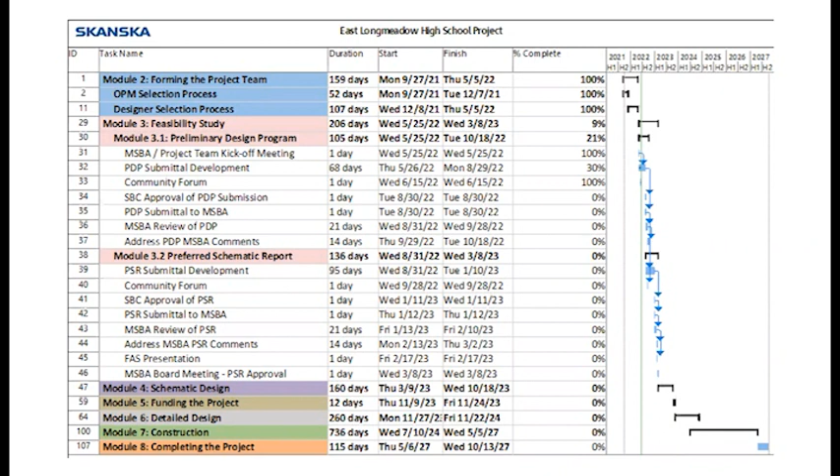Next up is Fantini and team. I think Christian is controlling the PowerPoint remotely. So we will move into the existing conditions report, and I think Christian is actually up first.

I think it's Eric, Helen, but yeah, we did do two different visits out to the site, one to work with the site team, and one to work more on the building itself. I'm going to pass it off to Eric to talk about the existing site.

For those who have not met Eric yet, this is Eric Vangsness. He's a landscape architect with SMMA and also a graduate of this institution, this school district. Proud class of 2001, so welcome back. Thank you very much. So that's why I have the big smile on my face. Obviously, this is a dream come true, let me just first say.

So what we wanted to start off with today is reviewing where this site sits in relationship to the town. What is this site surrounded by, and what makes this site special? Just looking at this first aerial, I think it becomes readily apparent.

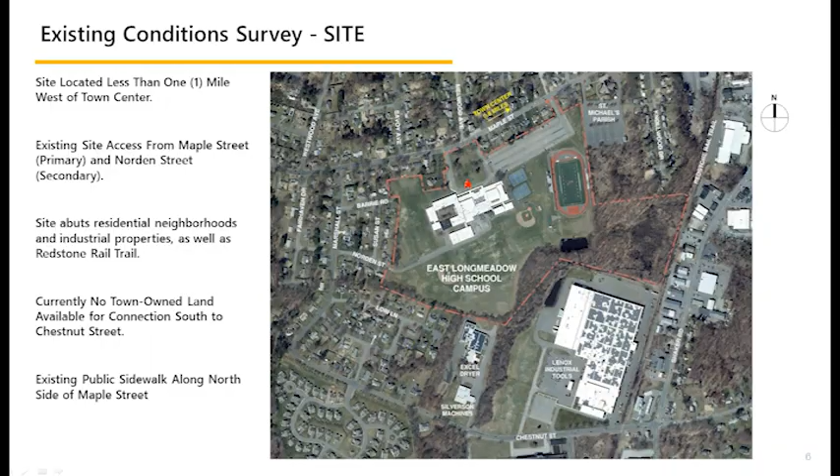This site is a little bit less than a mile from the Rotary, and it's a large site, a little over 61 acres from what we gathered, and it's a single parcel. The frontage is on Maple Street, with three points of access basically from Maple Street: one right in front of the building with the horseshoe drive, then there's the ancillary connection at the northeast corner, and a secondary access down on Norden Street.

The site has residential properties on Maple Street to the north, St. Michael's Parish to the east, Lenox Industrial Tools — I knew it as American Saw growing up — to the south, along with a couple more industrial businesses, Excel Dryer and Silverson Machines. Then we get into the neighborhoods: Laurie Lane, Norden Street, Barrie Road, and Marshall Street residences to the south and west.

But I think what makes this site so special is it's this huge green park amidst all this developed space. Very few towns get the opportunity to have such an expansive program of athletic fields and open space when the rest of it is so highly developed. So this gives you an idea of where the site sits in town.

Obviously to the west is Longmeadow. Right now, as far as we know, there is no town-owned connection to Chestnut Street. When we first had these initial conversations, there was some talk about whether we could make a connection to Chestnut Street to maybe alleviate some of the congestion on Maple Street. Right now the town doesn't own any property to that effect, but there could potentially be some opportunities, which we'll get into with the preliminary site studies of potential connections. That would have to be coordinated with the property owners to the south.

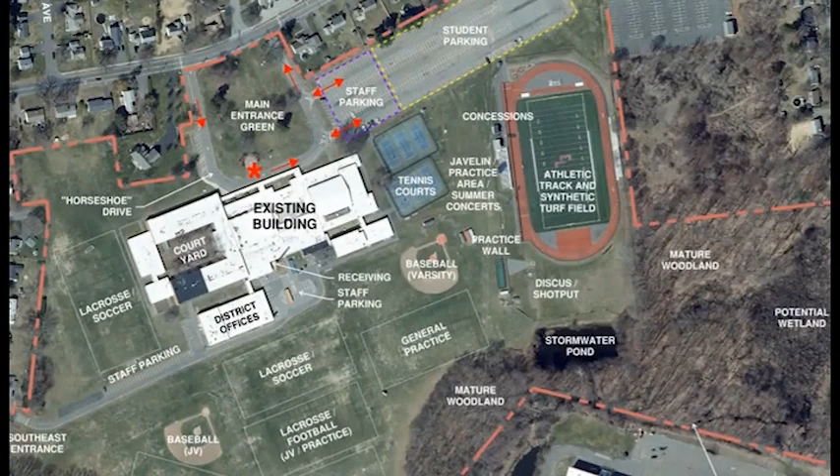There's really no traffic management measures present in that main parking lot right now. It's really just everybody converges, it clusters and bottlenecks up, and eventually, by 2:15, most of those cars had exited. In fact, I think we actually saw that entrance clear out later than the Horseshoe.

The Horseshoe seemed to be empty, and this one was still backed up, which I thought was interesting. You'd think some people would go the other way, but we also saw that some parents were picking up students.

In St. Michael's Parish, right now there's a sidewalk that runs along the north side of Maple Street, and there's the signalized pedestrian crossing. There's also one on the west side of the Horseshoe, the signalized one at the east side of the Horseshoe, but there's no real defined crossing at the northeast entrance.

So what we saw was a lot of kids were actually walking east. They cut through the lawn, they go through St. Michael's Parish. Some are picked up by cars, some continue on to points north and east from there. But there's really no dedicated pedestrian routes for them to do that - it's walking through grass and private property.

On the site, there's the 6 existing tennis courts. Those are in fair condition. They're going to need to be resurfaced pretty soon - we heard in the 2 to 3 year time frame.

There's the existing football stadium or multi-sport synthetic turf field for many of the fall sports, and the stadium with the bleachers. We did note the press box and the announcer's box are not ADA accessible - they don't have a ramp up to them. We also noticed some condition issues with the concession stands, and I know there was concern by the athletic director about the condition of those.

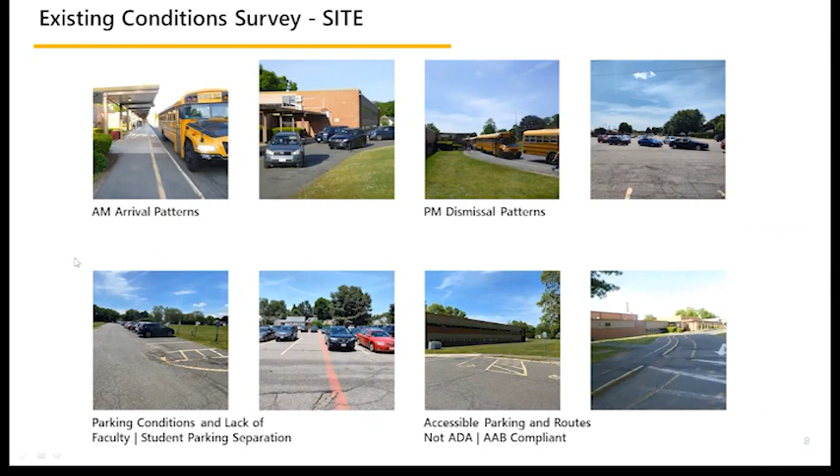And then just again, there's wooded wetlands we should keep in mind to the south. And in terms of just a quick touch on utilities that we should keep in mind, a good majority of the site ends up draining toward the existing stormwater pond at the southeast corner. And right now we've noticed some issues, and we've talked with Bruce and the other staff about some drainage related issues in terms of roof drains that are tied into floor drains.

During heavy events, we understand the boiler room floor drains actually back up and that water can get into the boiler rooms. We also understand right now sewer is gravity fed, and there's some issues associated with it - it doesn't have much pitch to it. So every year or 2, we understand there's blockages that can occur, and those blockages have to be flushed out.

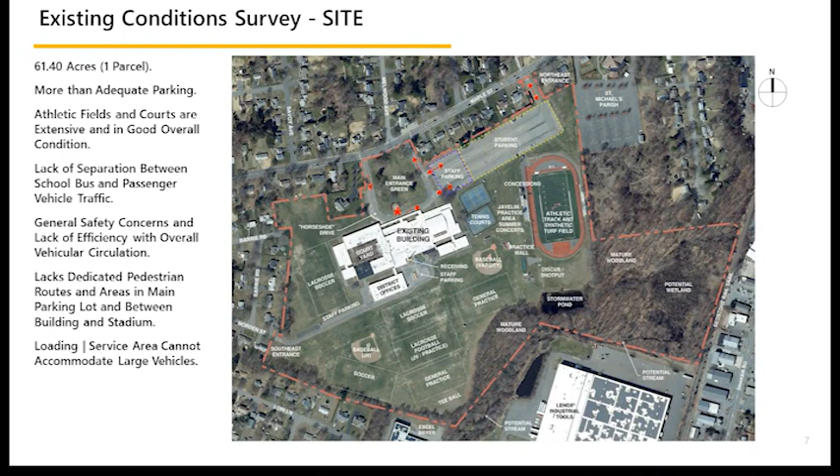Municipal water services the site, both the irrigation system and the building itself. We do understand though that that's asbestos cement material, so we would certainly - that would be an opportunity to upgrade that to a more modern material like a ductile iron or something of that nature.

But again, it's a magnificent property. You don't want to take that away from it. It's a magnificent property, and there's a lot of opportunities here. Next slide, Christian.

Okay, more site specific now. We already talked a little bit about the arrival patterns, how the horseshoe ends up getting a little bit clogged with school buses and passenger cars getting intermixed. Most of the school buses come on the earlier side, which has quelled that a little bit. We weren't here during the busiest traffic, but you can see in those top two pictures that both types of vehicles are using it.

PM dismissal, we talked about that as well. You can see that image in the upper right showing all those lanes of cars converging at the northeast corner.

Generally site-wide, the pavement is in fair to poor condition. There's a lot of cracking, potholes, and surfaces that are not ADA compliant. So the pavement really needs to be upgraded.

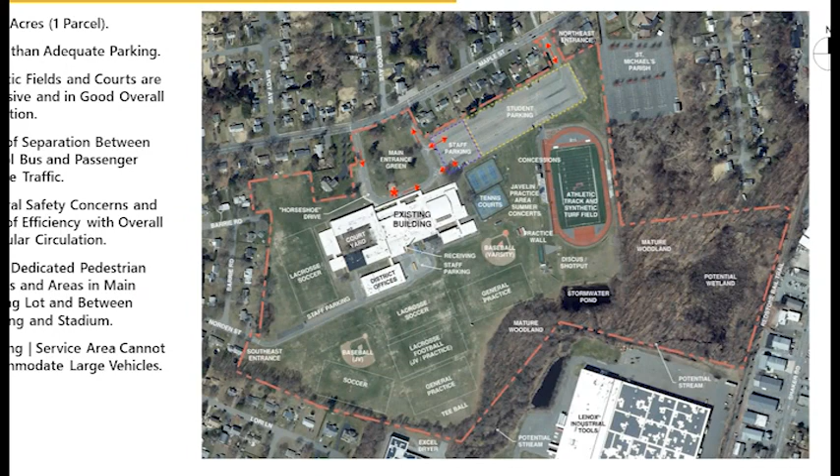It's a great question, so we don't know yet. We will have a wetland specialist actually delineate what are wetlands on the site. Now, what we can tell you is that in looking at the pond, just by eye, from my experience, it does look like it has naturalized. It doesn't look like a typical detention pond you would see at a shopping center or something like that. It does appear to have naturalized and have water in it most of the year. So we'll have to see.

But yes, if there's whatever's mapped as a wetland, there's a state 100-foot buffer from those wetlands that at least would be under the Conservation Commission's purview.

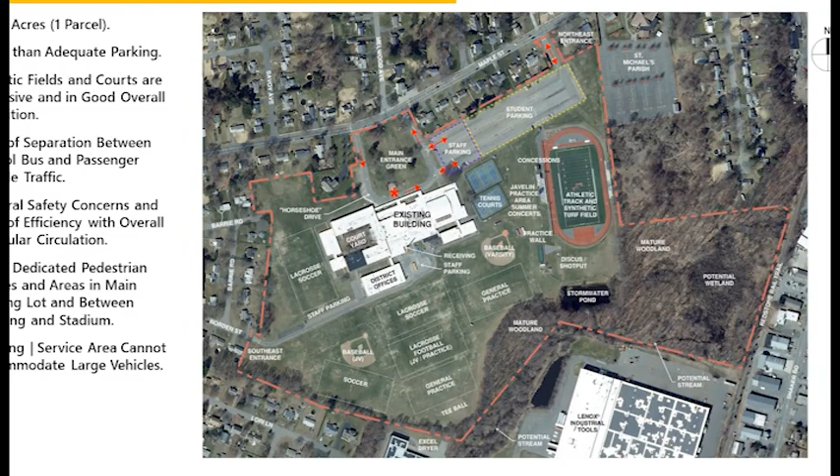I think you're up, Christian. Great. Well, again, I just want to thank all of the staff at the school, because we were out there for two different days and really got a thorough tour of the site and the building.

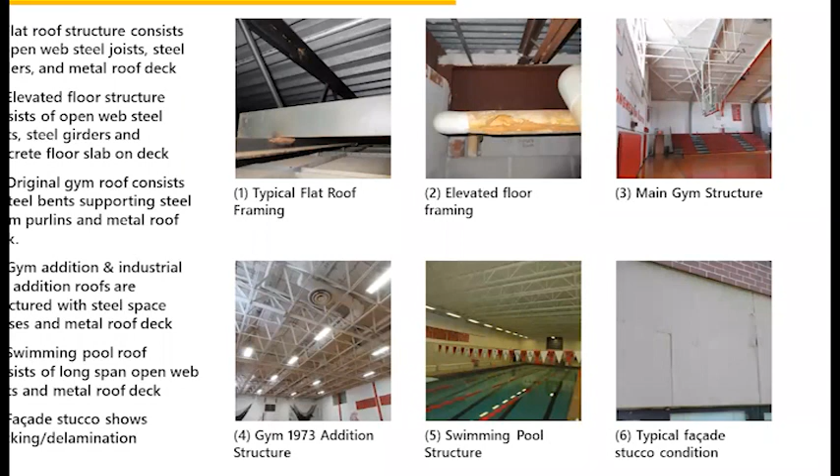These are some pictures from our structural engineer from RSE, our structural engineering consultant. For the most part, as you'd expect, there are different structural systems for the spaces and also for the three different eras of the building: the 50s, the 60s, and the 70s. Most of it is open web steel joists with a metal roof deck. And where that becomes a floor for the second floor, there's a concrete slab on top of that metal roof deck, as in number 2.

The gym is steel bents, those large framed members you see spanning the gym. The 1973 addition is a space frame, which is basically just an open web steel truss, but going in both dimensions so that it can really span considerable distances. The swimming pool also has open web joists that are long span. In terms of structural condition, the building is actually in pretty good structural shape.

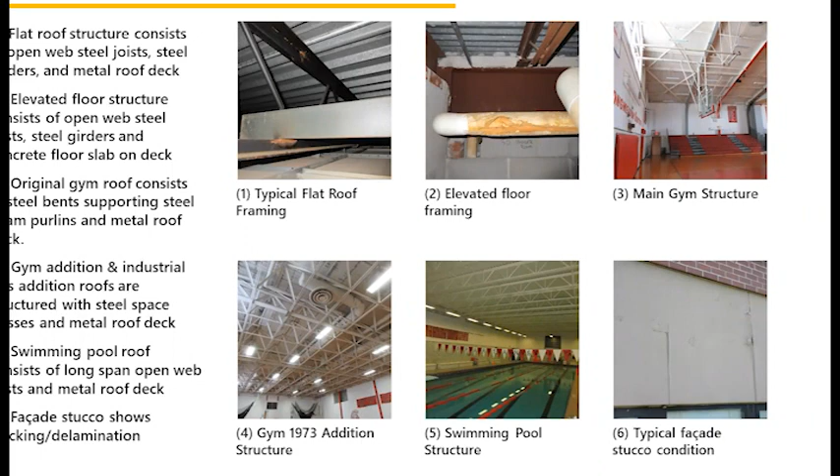I think the big question is, if we do renovate it, what measures would need to be taken to help support the existing structure. Would additional shear walls have to be included? Would the masonry walls need to be structurally tied off to the metal structure at the top of the walls? Unfortunately, we really can't get to that until we get a more defined ad-reno scheme. But it's something we're tracking with RSE, and we look forward to figuring out more on that. Any questions on existing structural?

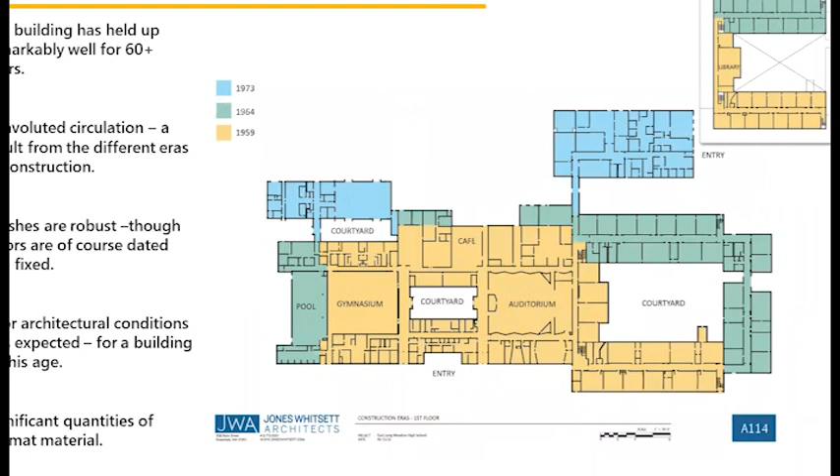In terms of the architectural, the building has held up well for 60 years. The circulation is quite convoluted, and I think you're all well aware of that. The finishes are robust, though the colors are of course dated, since most of it is glazed brick that once you pick the color, that's it forever.

There are other poor architectural conditions which I'll get into, but really everything is to be expected for a building of this age. And we are getting a hazardous materials report done right now. There are significant quantities, and we'll be able to itemize that later as the process moves on.

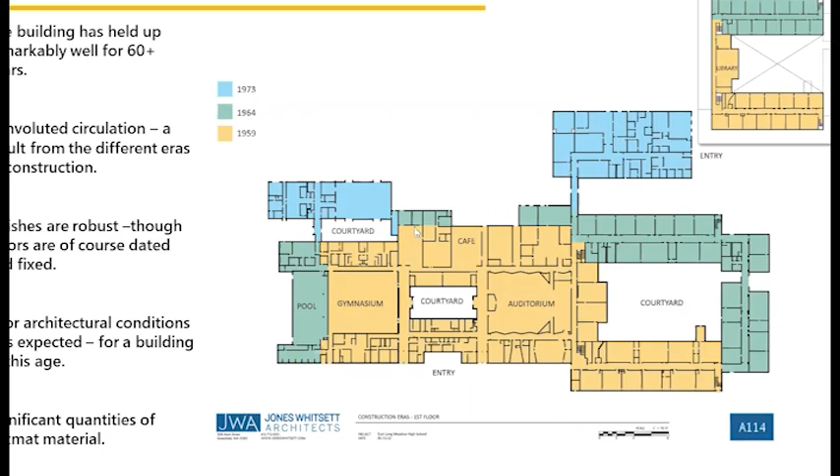In terms of the positive side, the school is really being well utilized, and the staff is doing the best that they can. I think Dorian, who spent a lot of time with the staff at the programming interviews, was really impressed with how they were working to showcase student display and utilize the outdoor spaces that Eric mentioned, the courtyards, especially the one in front and the one by the classrooms. There's a very strong athletic and sport wellness focus.

And then just constant examples throughout the building of universal design for learning, really trying to meet students where they're at and come up with spaces that interest the students and are tailored to their needs. So the school is really doing the best that it can.

The furnishings are, of course, dated and certainly don't encourage collaborative and project-based learning. Squeaky desks that are fixed to the chairs, not much flexibility there. The hard surfaces, grid ceilings, dated tile, all really reinforce that institutional feel. And of course, there are some spaces, like the space you're in right now, with lack of natural light or appropriate ventilation.

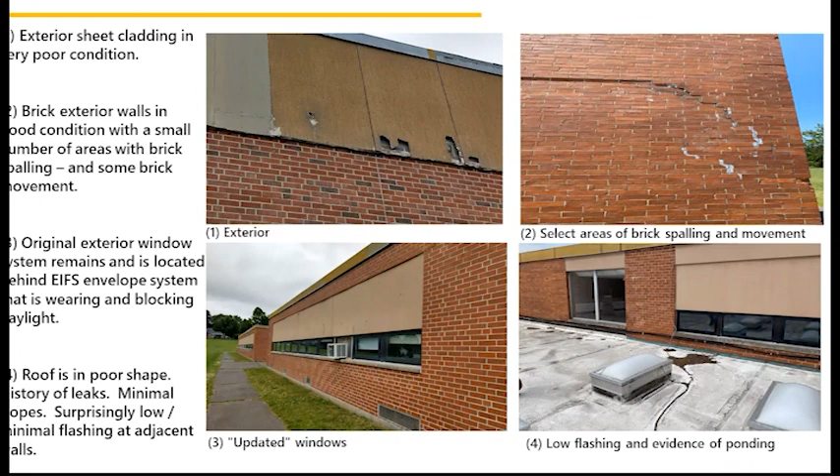I think the thing that struck us the most as we were able to walk around on it was how low the flashing is to the adjacent walls. So we imagine that's probably a pretty consistent source of the problem. You can imagine 18 inches of snow on this roof, that's going right into the brick adjacent.

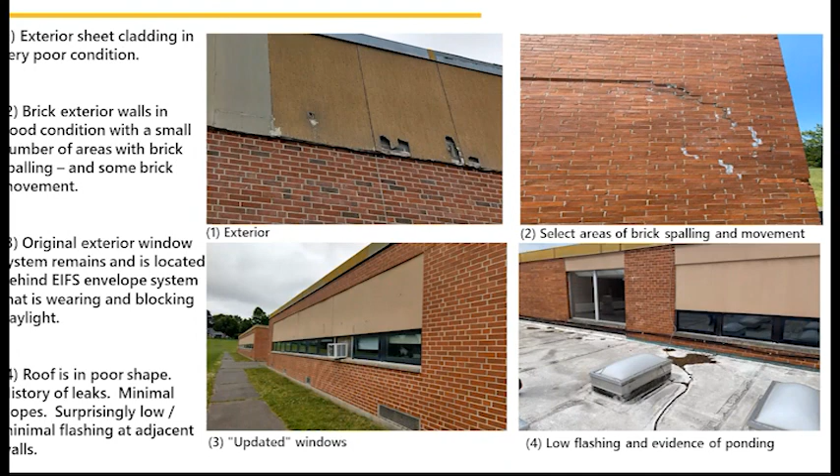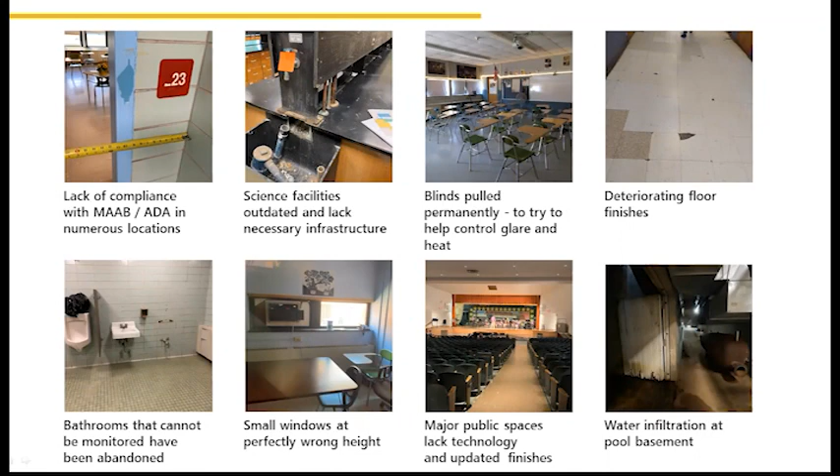In terms of the interior, again, to be expected of a school of this age, there's a lot of lack of compliance with Massachusetts Architectural Access Board or ADA. This is showing a typical classroom door, and unfortunately, you're supposed to have an 18-inch pull clearance, and right now it's more like 11 inches. And everything is so rigid with that glazed brick, that would be something very, very hard to change in the future to make compliant.

Science facilities are outdated. This was a sink in the chemistry room that's been kind of decommissioned. You can see the blinds pulled in classrooms, and that's glare and heat coming in through those windows, doing the best they can to modify the temperature inside. Deteriorating floor finishes are, of course, common.

The bathrooms, this was interesting, bathrooms down at the far end of the classroom wing have really been abandoned since they can't be successfully monitored by the staff. And there were a host of plumbing issues with those abandoned bathrooms. Again, the small band of windows, major public spaces lacking technology.

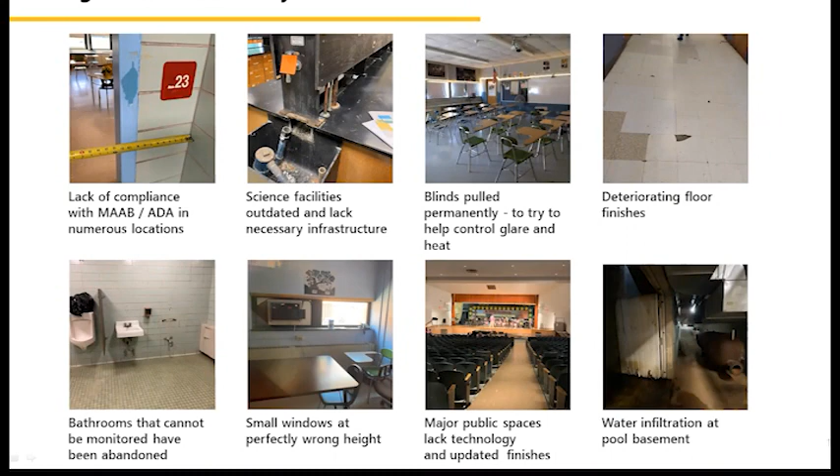This was a picture, I don't know how many folks have been down in the pool basement under the pool, but it's just a very utilitarian space, but there are some issues with water infiltration coming in from the outdoor doors there.

I'm going to pass it over to Helen to talk about some of the MEP. Are there any questions on the architectural, existing conditions of the building?

Will we talk about whether things are potentially worth saving based on this assessment? Specifically the auditorium, the main gymnasium. I know it's one of the designs that's a renovation addition on the next slides. Are we going to talk about that more?

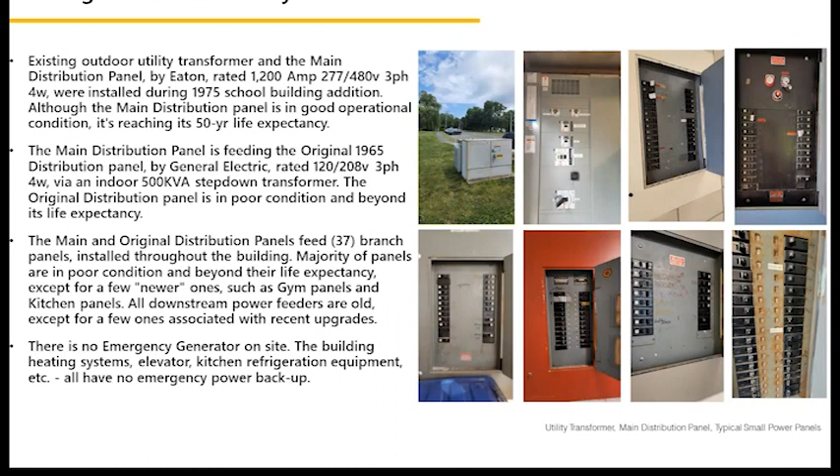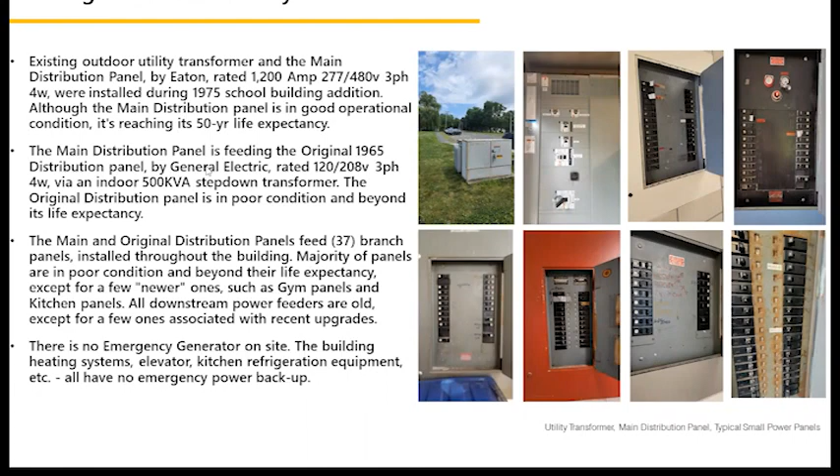We will, and I also want, as we take this slight pause, to reiterate that whether or not you end up with an addition renovation scheme, MSBA requires us to study what it would take to just upgrade this building to code. That's for your information, to understand that just keeping the building as it is, over time, you're going to have to continue to upgrade it. So understanding what it would take to do that is part of this process. And you'd also do it for an ad reno.

Along those lines, you look at that first picture where it's lack of compliance in the doors. That would mean we'd have to change every door in the building, unless we get some exception, which we sometimes can get for existing conditions, yes. And again, to price that, we need to put a number on this for comparative purposes. Then we'd assume, yes, we'd have to do that.

Ellen, is it fair to say that getting an architectural or code variance on a school project is typically more difficult than it would be on something else? I would say yes. I don't know, Christian, you have an opinion on that? We ran into this exact same issue on a 1912 historic building, and we were able to get a variance in that condition, but it was a significant historical building on the National Register. I think it'd be a lot harder for this type of a school.

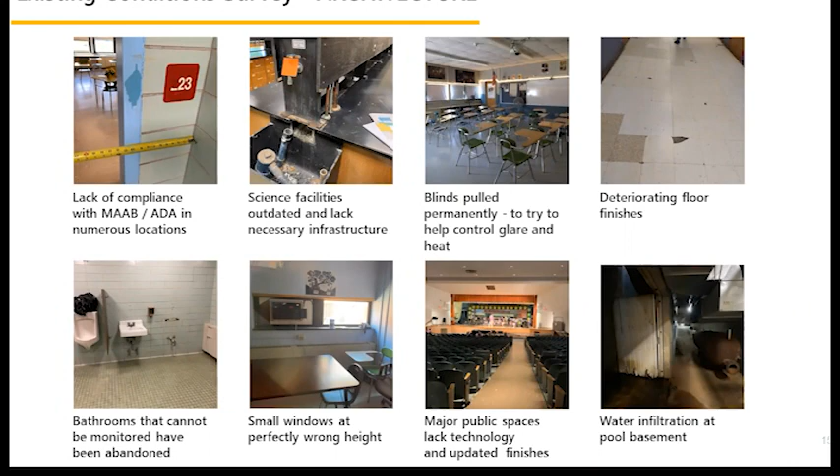Again, it's good information to have. It's helpful. It's a requirement of the MSBA, but looking behind the requirement and why they require it - it really helps force the architects and the school building committee to think about what portions of this building are worth saving, if any. If we could do an ad/reno, what makes the most sense to save? We'll do our best doing that. In the long run, it also helps illustrate to the public why we chose to go the path that you'll eventually direct us to proceed in. So all part of the process.

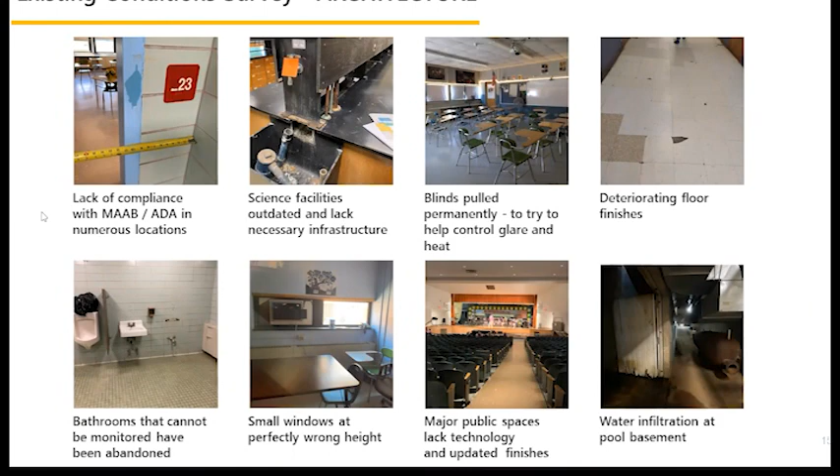Should we move into the systems? This will surprise Bruce and Joe not at all, and probably most of you. Our engineers did MEP and fire protection review. Certainly if you have any questions, I can direct them back to the engineers - I'm an architect.

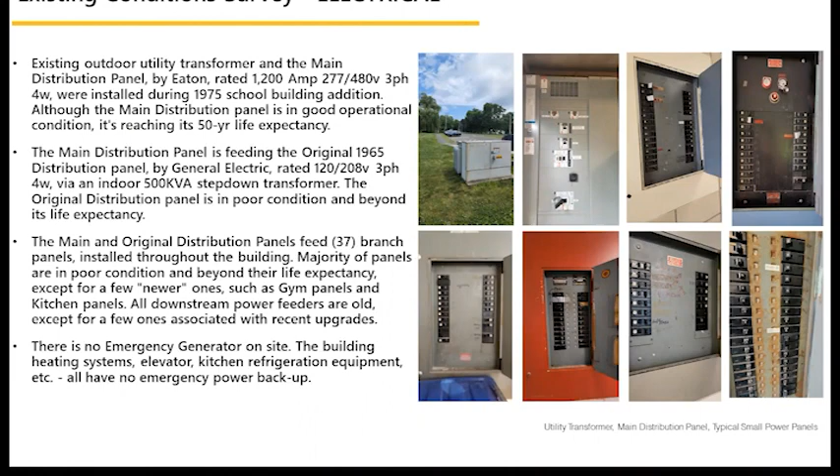But in summary, electrically, the outdoor utility transformer and main distribution panel are in good operational condition, but at the end of their 50-year life expectancy. The main distribution panel feeding the 65 building is in poor condition and beyond life expectancy. Distribution panels are similarly in poor condition and beyond life expectancy. And maybe more critically, there is no emergency generator on the site.

Moving inside, thinking about electrical receptacles - yes, there are many and they are operational, but they are also at the end of their lives. There are too few, which we heard repeatedly from every single person we talked to in the programming. In science and kitchen areas, they do not have the code-required GFI rated outlets. In general, lighting illumination is sufficient, it's fine, but there's a real lack of control - it's kind of like on or off. In current practice, we like to have a little more control and modulation. But on the good front, the fire alarm system is in good operational condition.

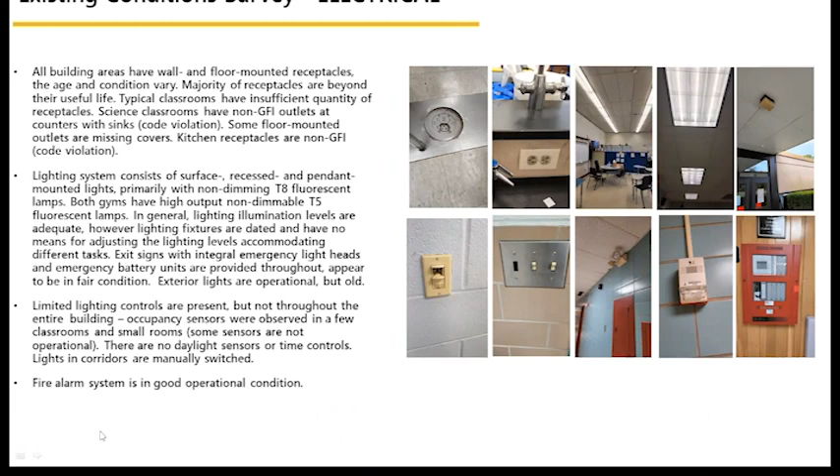Mechanically, pretty much most of the equipment has exceeded its life expectancy. It's also important to note that the boilers, while newer, are distributed, which makes it more difficult for maintenance and keeping track. Hot water pumps and piping are end of useful life and require replacement. Where there is limited air conditioning, those also require replacement, and really there is no comprehensive air conditioning, which is the more notable part. Our mechanical engineer also noted the existence of the underground fuel oil tanks. Obviously you can't get underground to see the condition, but it's something we'll keep track of as we consider projects here.

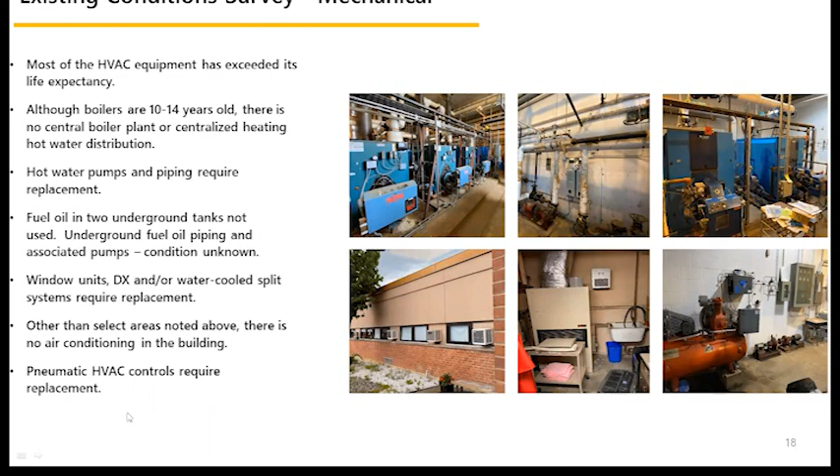Again, moving inside, much of this entire list - the summary is they are all at the end of their useful lives and require replacement. I think the pictures speak loudly: UVs, the fin tube radiation, air systems equipment, fume hoods, and HV units and exhaust fans.

Ellen, I have a question, but it might be for Bruce and Joe. So these localized boilers that are throughout the building - presumably there's no redundancy, right? So if one of them goes down, you lose whatever that feeds.

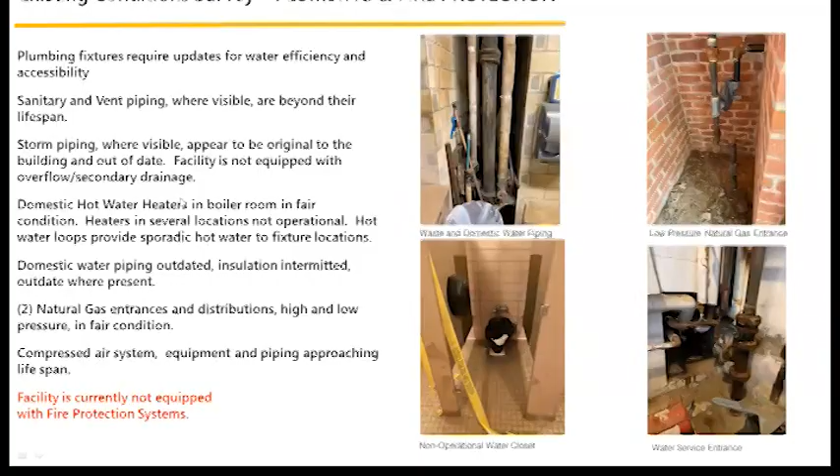No, they all are redundant - there's two boilers in boiler room 2, and obviously one acts as redundant to the other. And subsequently in boiler room 1, it's the same thing - I believe there's 3. Is there 3 in boiler room 1? It's been a while, yep. And obviously based on outdoor air set points and everything else, the first one will come on until it can't meet what is needed to heat the building, and then the next one comes on subsequently - all 3 if they need be, and typically that is until it's minus 10 or 20 degrees outside. So we do have a little bit of redundancy. All the pumps have redundant pumps on everything also - every zone has 2 pumps.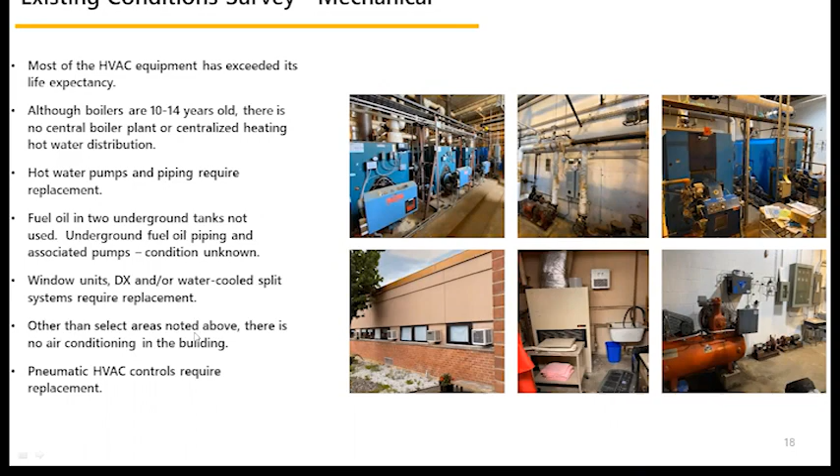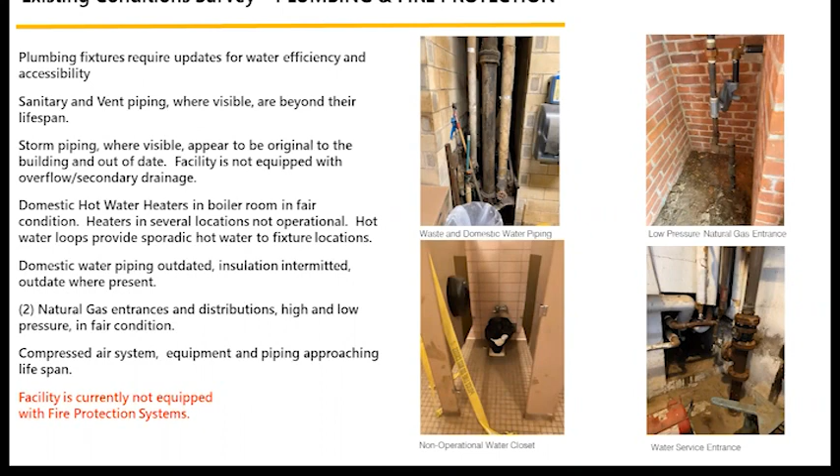Moving into plumbing and fire protection - you saw in some of the pictures Christian also shared, plumbing fixtures require updating for efficiency. Also condition-wise, sanitary and vent piping are beyond their lifespan. The storm piping, where visible, appears original, and there's no overflow or secondary drainage. Domestic hot water heaters are in fair condition, but heaters in several locations are not operational. Domestic water piping is outdated, insulation is intermittent, and needs attention. 2 natural gas entrances are in fair condition. Compressed air equipment and piping are approaching their useful lives, but most importantly, there is no fire protection system, no sprinkler system - that would certainly need to be addressed in an addition/renovation project.

Questions on MEP Systems?

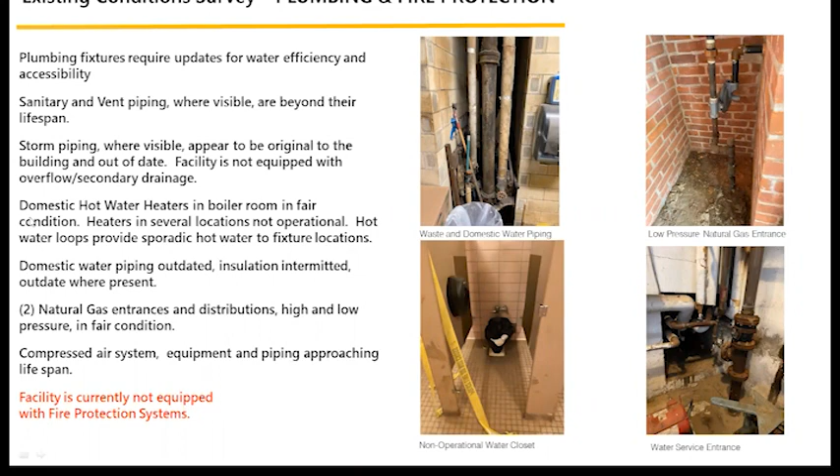On the plumbing system, this is basically just what we could see. We have no idea - well, we do know when we back up, we have those issues, which I think you highlighted in terms of limited gravity in terms of sloping. So those are things we really don't know yet. That's right, we know about the electrical, we know about the roof. Plumbing's sort of, we know as we go.

Now, should you go in the direction of an addition or renovation, we'd do more investigative work to get some scoping done to see if we could determine the condition of the pipes. But it's a good point - you can only see what you can see.

I do have one comment to make about the USTs. Those were replaced, and Joe, I can't remember the exact date, 2011 or 2012. Both underground storage tanks were replaced, one 20,000 gallon and one 10,000 gallon unit, along with all the piping, the root system, everything that goes along with it.

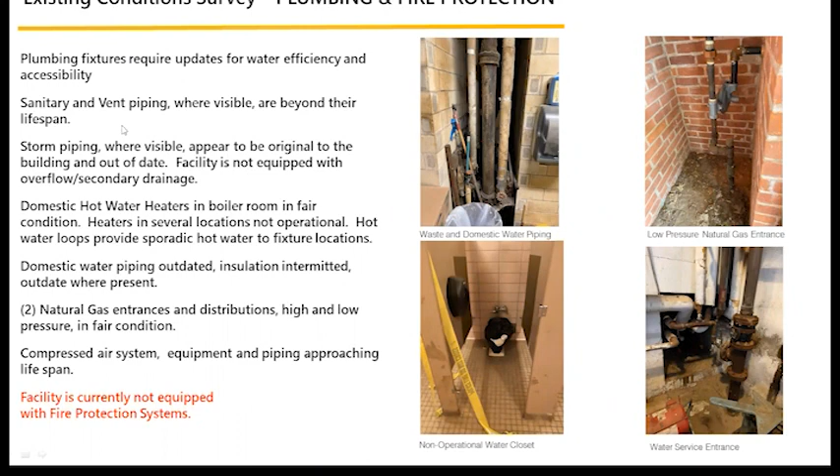Was it 2010 or 2011? How long did those last? 30 years or - we're not even using them now, regulations change. Right now we're not even using those, right? Not yet - that's another redundant system, based on the commodities, the markets, and everything else.

Okay, great, we'll move into the next topic area.

Communications update with item number 4 - is that Ben, is that you, or is that a combination? We're still in this topic area, I'm sorry, I meant within. Are we okay on time? Yeah, we're doing well. All right, good, I think we're switching over to Dory.

Sure, so I'm going to - okay, hi, can you all hear me? Yes, we can. Great, all right, I'm going to just quickly reference.

I think most of you are already participating, so you've already been witnessing our visioning sessions. We've now had 2 visioning workshops led by New Vista, and both have been pretty productive. We've gotten some really great information, and we're constantly sharing information back. They build on each other, but there's still room to participate if there are faculty who'd like to join. The real priority of those is to develop our educational background for the project, because the district has the responsibility of writing an ed plan for the proposed project this summer, and this is helping the design team understand that plan, as well as helping the administration hear from the faculty in looking towards the future.

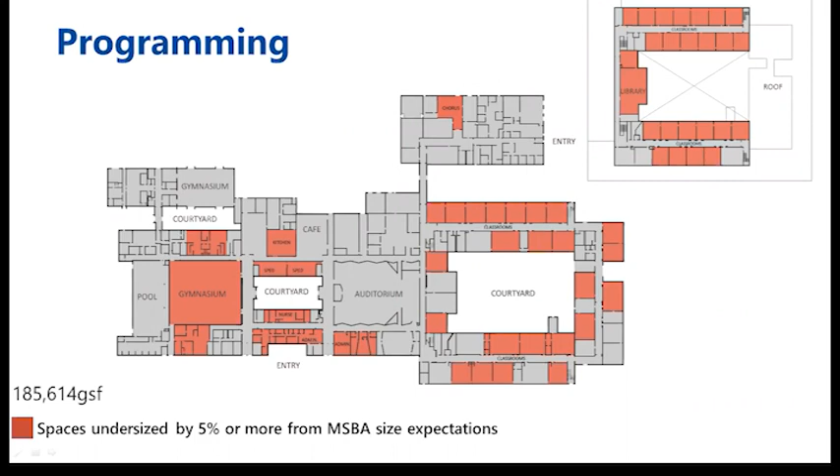Any questions about this, this quite simple space analysis, before we move on? Christian, you want to go to the next slide?

We're going to talk a lot more about programming at the next meeting. But now that we've been in the building and done measurements, and compared what the school currently has to the MSBA's expectations for a new school today for 800 students, I thought it would be helpful to give you some sense of how those expectations stack up with what you have.

It's nothing to be critically concerned about. It's helpful to understand that being part of the MSBA project stream means you're not just picking and designing spaces per your desire and needs, but also with mindfulness to what the MSBA considers important and what they're willing to reimburse financially. Their commitment to these spaces is based on the state's desire to support the educational program of the school, and a great deal of study that's gone into prioritizing certain types of spaces.

For instance, the existing school has 37 classrooms. The MSBA nowadays would expect a school of this size to have 27 classrooms, but classrooms would be larger. That's the philosophical difference: education today, where classrooms are not owned by every teacher.

To some degree, the school had that many classrooms because of time—even as enrollment has declined, it has kept the classrooms that existed and utilized them by spreading teachers out. Whereas building new, you would not be expected to have a lower utilization rate of those classrooms; you would expect a higher utilization rate of fewer classrooms with more space within them.

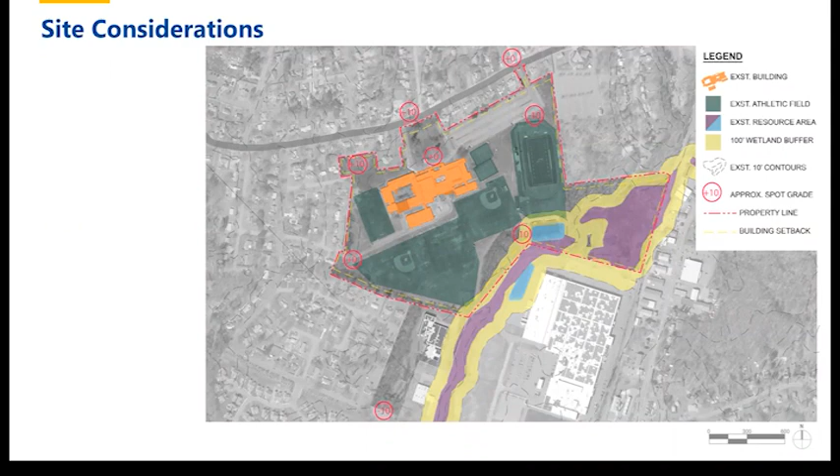Wetlands are an opportunity for outdoor education, but they're also something that needs to be considered. With the existing neighborhoods, we have to think about noise and traffic. And then for parking, we have to think about efficiency - having it close enough to the building, especially with accessibility. Those are the common themes.

And of course, the existing synthetic turf field and the stadium - we are anticipating removing that. So working this program, and taking all of those factors into consideration, now we start to look at where a new building could go.

You can see point blank, right in the middle of the site, is the existing facility. We mentioned this before, that one of the disappointing things about where this building is located is that someone driving by, if they don't know the site well, wouldn't even know there's this expanse of green space behind the building, because it stretches all the way across that green.

So when we start to look at places to position this building, is there an opportunity - and we use the term - to pull back the curtain on the site? To set the building in a place where it's still prominently visible, but so is the rest of the property that people have come to love and enjoy and use for athletic and other events.

So when we factor in things like proximity to neighbors, noise, phasing, existing site features to remain, and spatial constraints too, we looked at the northern portion of the site where the existing parking lot is - maybe not recommended, simply because it's a little tight on space, especially with the stadium where it is, and being very, very close to those residences.

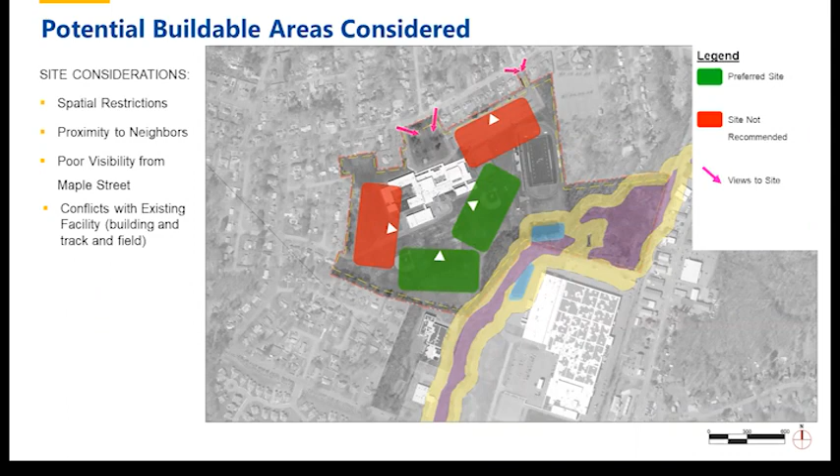But before we get to those, for a simple code upgrade, and I welcome Christian's input from an architecture perspective, I'll just say from a site perspective, not a lot would change other than potentially some accessibility upgrades. Make sure the parking and accessible routes meet ADA and AAB requirements. Possibly some circulation improvements within the parking lot, and possibly some utility upgrades to cure some of those things discussed earlier.

Christian, I don't know if you want to touch on the architecture parts of that. No, I think that's fair, Eric. In terms of just the code upgrade, we would try to keep this option to the minimum of really bringing things up to code, replacing aging utilities that must be replaced right away, but keeping this as minimal a scope as possible. Typically these end up being a surprisingly high number just to bring the building back up to code.

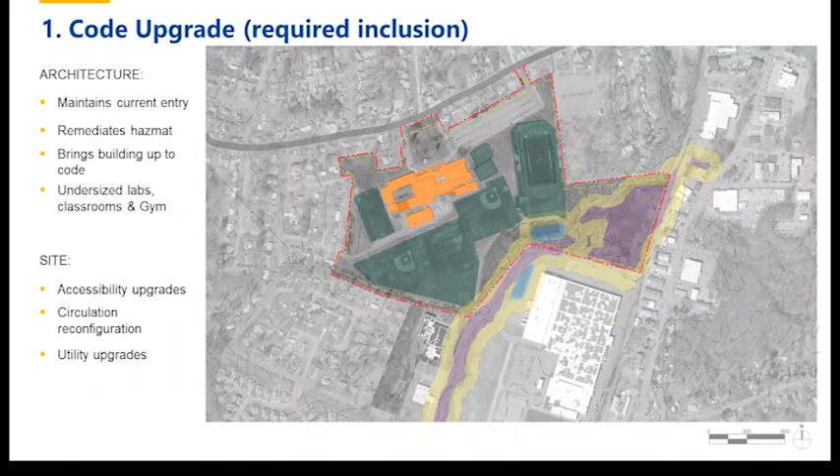There would be a little bit of a reconfiguration of the athletic fields. If there's an addition off the back or whatnot, whatever's lost, we would look to replicate somewhere else.

Now, one of the things on all of these options is that right now some of the field orientations are not recommended. For instance, the baseball fields — from home plate to second base, they currently face southwest, which is actually opposite of what's recommended. They recommend home plate to second base face east-northeast. So any fields reimagined on this property, we'll look to give them the preferred orientation, though it doesn't always work that way. Same thing with football and soccer fields — they tend to want to run north-south as opposed to east-west, but we've got some fields here that run more east-west.

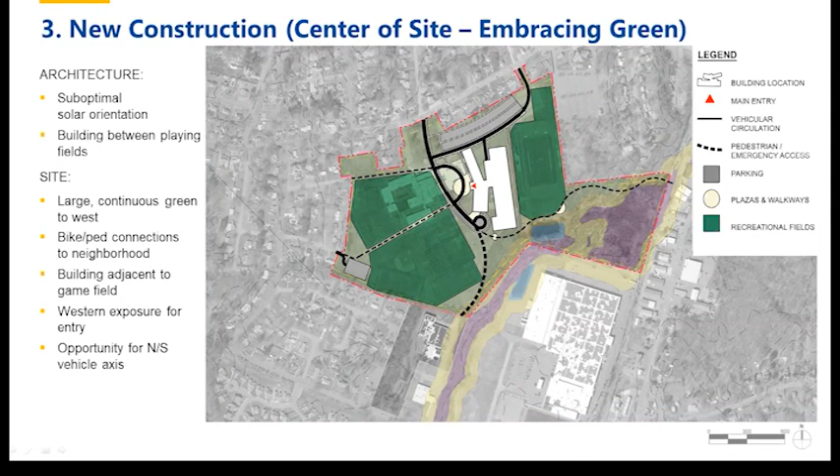An alternative to that would be placing the building behind the existing building, creating a large open green space at the front, keeping the main parking field in a sense where it is today, and repositioning some of the athletic fields around to facilitate this. Some of the benefits here: the building's close to the stadium, and there's an opportunity to create an even greater green space, possibly with an athletic field in front of the building. We're also separating circulation.

In this sequence of events, you probably have the buses come in across from Melwood.

They would use that internal loop, and then potentially we could do parent drop-off along the back of the building.

Now, one question that may come up is, do we need 360-degree access around the building? The answer is some towns require it, some don't. We're working on some projects right now where the programming of the school or the emergency response wants 360-degree access, and we'd want feedback from your police and fire departments to determine if that's desired here. But we have a lot of communities that say give it to us on 50% of the side, or even just one side, and that's all we need. So it's really just going to be up to the town what you'd like for access around the building and what emergency response would require.

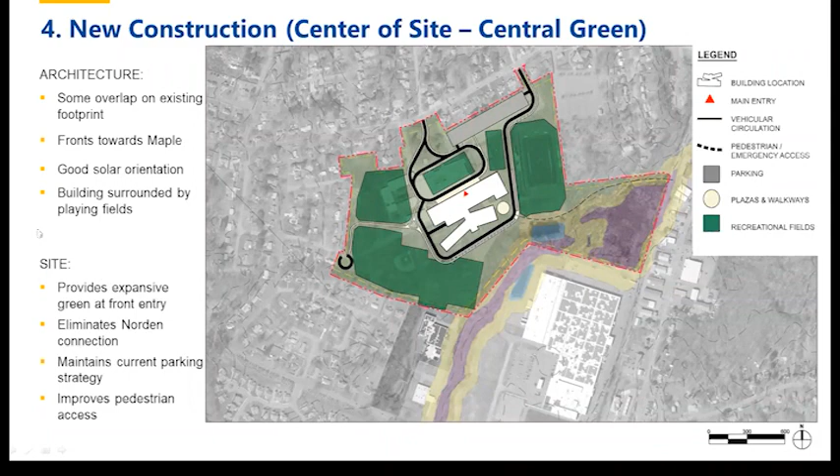Now, as we look at options for the rear of the site, this would give us an opportunity to add a lot more green space fronting the building. It would be set back, so phasing would be a little bit simpler.

In an option like this, we would probably look to preserve the service access using Norden Street, simply because of the proximity to the building. So that would probably stay the same. It wouldn't introduce any other traffic, though, other than potentially, in an effort to separate student parking from faculty parking, Norden Street could be used for faculty and staff.

We talked to Frank when we visited the site back at the end of May, and I know there's a sensitivity to not bringing too much traffic through the Marshall Street neighborhoods, especially traffic that's more difficult to monitor, like students—it's a little more unpredictable. But if there's fewer cars and it's more adult traffic, it might be a little more appealing to the neighborhood, potentially. Maybe not, but it's something to consider.

So maybe a dedicated staff parking lot right behind the building or to the side, whereas we keep the students more in front, just to provide that separation. You can see here, maybe in this one, the buses can use that loop in front of the building, and parents can use that outer loop, so they can come and go without waiting for the buses. Again, these are just highlights—a lot of them cover the same basic principles.

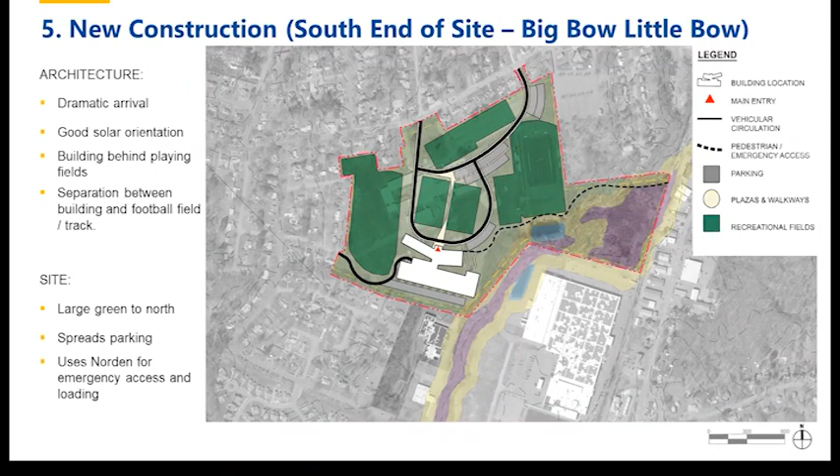This option really gets the building as far away from the residential neighbors as possible. It gets a little close to some of the Lori Lane residences, but for the most part it keeps the building pretty far away.

A dedicated bus loop in the front, and then again, looking at maybe 360-degree access, which the town may be interested in, sending the parents around the back. The only thing we always say with 360-degree access is it's more convenient.

So this school has the feeling in some ways of a park building, because of its communal ties, all the things that happen here. Even the East Longmeadow Marlins use the pool. It's all these community groups that use it for so many different reasons that we almost think of it as a park building. Park buildings don't usually have ring roads around the whole thing—they're strategically placed and the park comes into them, and they become a hub.

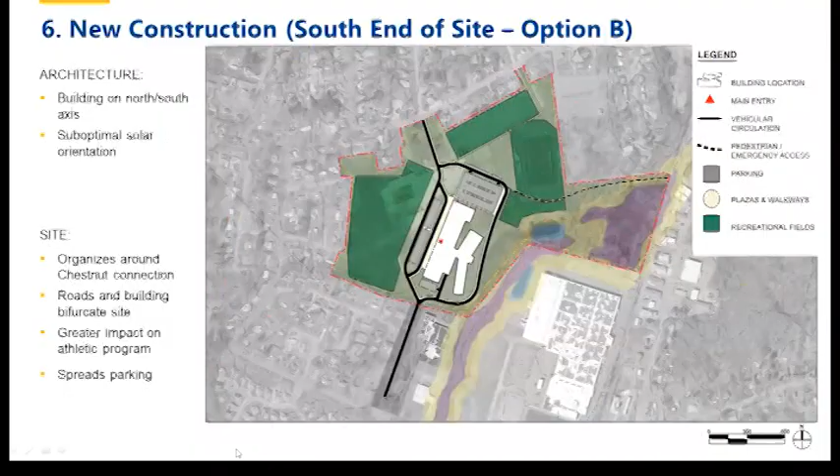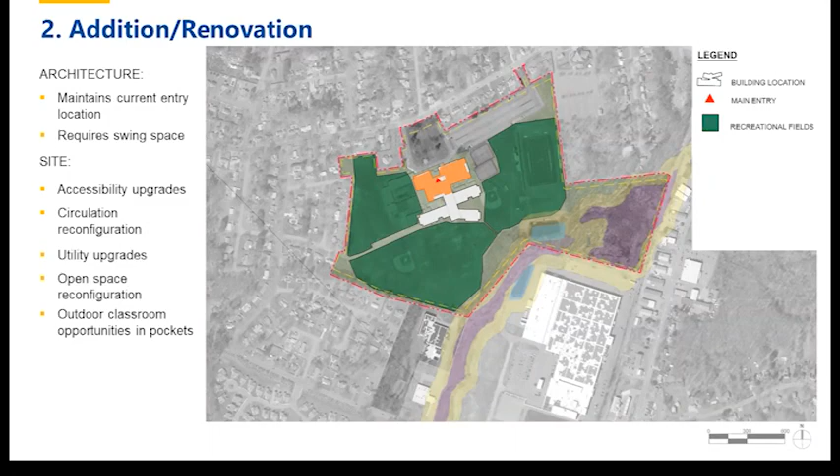Right now they're stacked - you've got 3 and then you've got 3. When a ball goes over the fence, it goes into another game. So there may be consideration to line them up in a row, so you don't have to worry about those conflicts, especially during a competition when a ball comes flying in. You can better prevent that by looking at a different configuration. But in most of these 4 you're looking at, they would be likely.

And the fireworks, they need to shoot those off. I think 5 is a problem for that. It looks like all of them would be. Would they? Yeah, because you need at least 400 feet depending on the size. So maybe 3.

Top left. Possibly on the left side, yeah, the west side, over there. Not that has to dictate.

I was gonna say, I know it's one day, but welcome to East Longmeadow. These are just - okay, certainly the 4th of July parade, we have to line it up here because we bring it to Birchland and disperse there. There's no other place to put it. We tried.

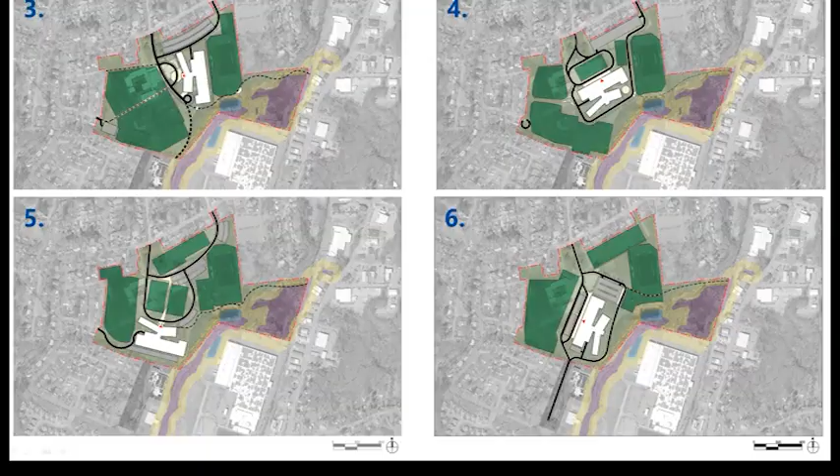Is that, Ben, is that you and Victoria? For communications, I think Victoria had something to share. Mindful of time, Victoria, if you want to update us quickly and then we can go. Sure, sorry, I'm just having a little hard time hearing a couple voices.

I think it's been covered by Dory, but we just wanted to recap the visioning forum that we had on the 15th, and see if anyone had any input, especially when it comes to outreach - if they've heard from anyone in the community that attended and what their feedback was, or vice versa if they didn't hear about it, and any missed opportunities we can look at for future planning of the forum and advertising it.

Also, I have some questions and answers from the community forum that I'm happy to share with the rest of the committee if they're interested, that were answered at the forum. And also just wanted to update the group that we are working on a FAQ to go up on the website.